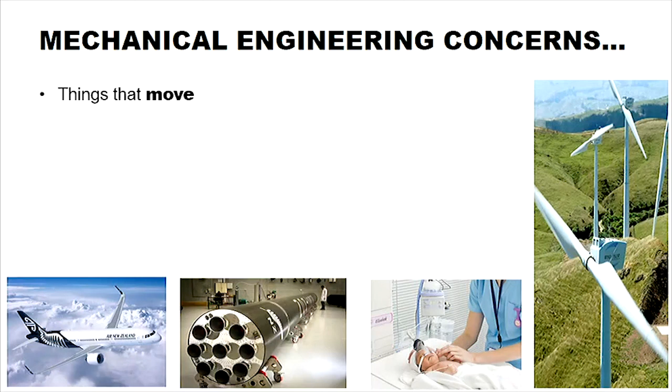Mechanical engineering concerns really everything that moves. The first thing you probably think about is a car, but there are lots of things that move, even things like the little motor that vibrates inside your phone. That is a mechanical engineering problem to a big extent, to make that one work and last for the lifetime of the phone. We concern ourselves with things that have to do with energy, use and conversion of energy, and also conservation of energy, of course.

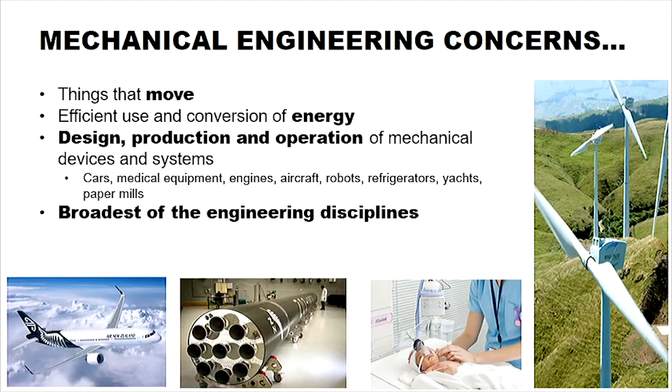And design, production, operation of all kinds of mechanical devices and systems. That is cars, medical equipment, engines, aircraft, robots, refrigerators, yachts, paper mills, and pretty much everything you can think of. I would say that mechanical engineering is one of the broadest of the engineering disciplines. You can work on pretty much any kind of area of your interest as a mechanical engineer. As soon as something moves, there will be a need for a mechanical engineer.

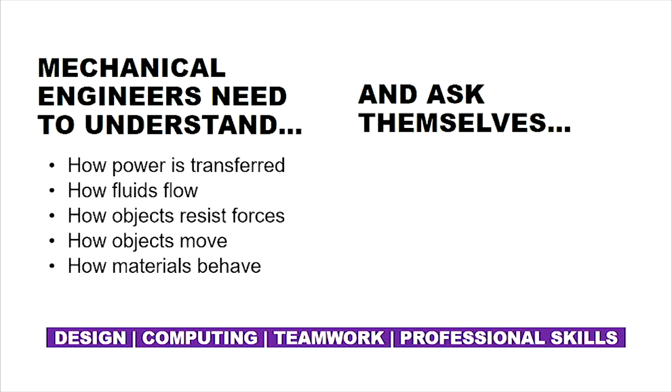As a mechanical engineer, you need to understand, for example, how power is transferred, how fluids flow, how objects resist force, how objects move, and how materials behave. That sounds kind of boring if you look at it just written on a paper like that, but it is quite exciting, all of that. And we ask ourselves, how can we control this? How can we design for the specific purpose? And how do we make our designs?

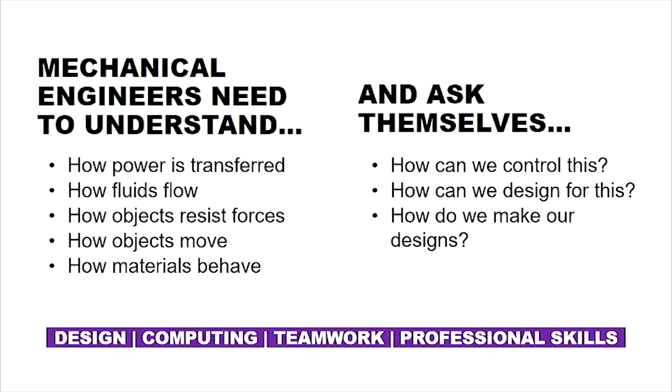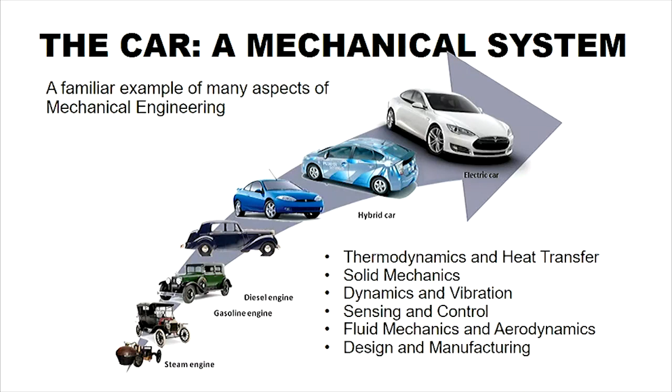Speaking of cars, the university has its own racing team. So if you're into motorsport like I am, I will show you just that in a moment. We have a racing team. It has about 50 students in it, and they build a new car every year from scratch - they design everything themselves, and then build it and race it in December in Australia every year. And that's a wonderful opportunity for the students to get hands-on experience. In my opinion, the students that have gone through the Formula team come out and they're much better engineers than the students that didn't get this opportunity.

But it's not just about cars. Mechanical engineering is about anything that has these basic properties: it moves, it transmits power, it needs to resist force, and so on. And they always give me these slides and try to put really interesting things into them. But I think they miss out the whole section of things that we don't think of necessarily as mechanical engineering, but where mechanical engineers actually work.

So I teach CAD - that's my profession, that's how I make my living. But I also use CAD and 3D printing as my hobby because I just think it's really, really fun. And I may not be the most girly girl, but I do like stuff like handbags. But I've always been disappointed - I bought these expensive designer handbags, don't tell my husband how much I paid for them - but I was never happy with it. I wanted a handbag that had to fit my iPad, had to protect my iPad, and had to have lights built in so I could find my keys when I get home at night.

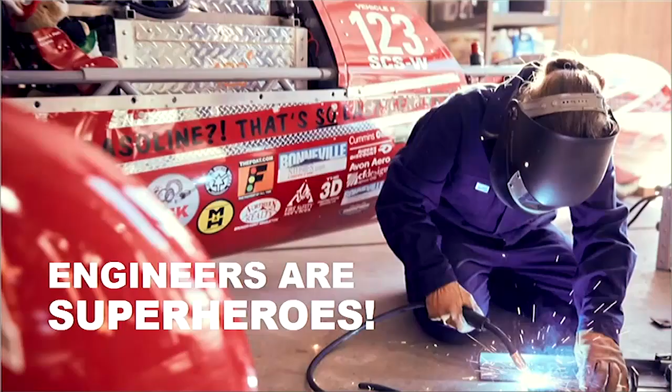Welding is one of my favorite activities. Typically not heavily emphasized in mechanical engineering, but it certainly is a specialization one can choose if you have that desire.

But as part of my superhero feeling of being an engineer, I wanted to save the planet, because that's what superheroes do. So when I was in engineering school 9 years ago, I decided that I wanted to build the world's fastest electric motorcycle. I wanted to show that electric cars are really fast and really sexy. So I just decided one day, let's build something that's insanely fast. So this is my own engineering project. This is my hobby when I am working on this, when I'm not teaching here.

The name of this motorcycle is the Killajoule. It is technically a motorcycle. I will send around two things. This is my next design, which I'm working on. It's a motorcycle because it has 3 wheels, and the official definition of a motorcycle is a vehicle that has 3 wheels or less.

So this is technically a sidecar motorcycle, but a very extreme motorcycle. Philosophically, it's really a car with 3 wheels. It is the world's fastest electric motorcycle at 434 kilometers per hour. And yes, I am the driver. No one else fits in it. It's that simple. So if you're more than 5'2", sorry, you can't take it for a drive or a ride.

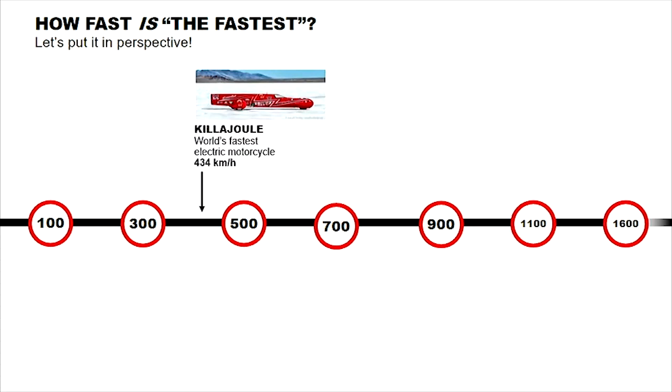Anyway, on this line, I am there. I am just a tiniest bit slower than the world's fastest production car. The world's fastest production car is at 447 kilometers per hour. That's quite a bit faster than your family car, a whole lot faster than the Nissan Leaf I drive to work every day. But it's definitely fast enough for Auckland traffic.

And 100 kilometers per hour was the world's fastest car in 1899. That's a speed that I'm happy if I can reach in the morning traffic here in Auckland. The world's fastest car in 1899 was battery powered. And then shortly after that, internal combustion took over. And now, as you all know, electric cars are coming back again, big time.

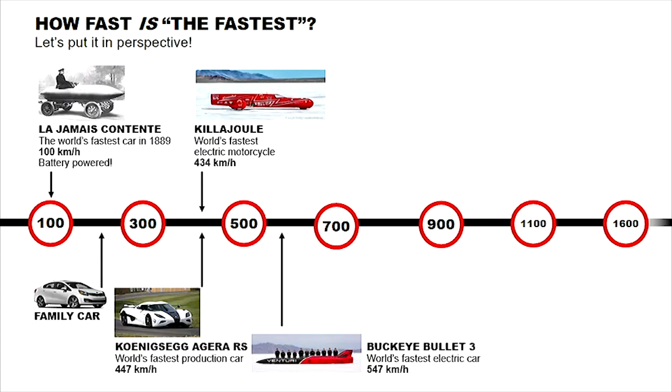The world's fastest electric car is a whole lot faster than I am, 547 kilometers per hour, built by Ohio State University. I want to beat them, of course. That is still quite slow compared to the world's fastest wheel-driven car, that's over 800 kilometers per hour. It has a turbine engine from a helicopter as its powertrain.

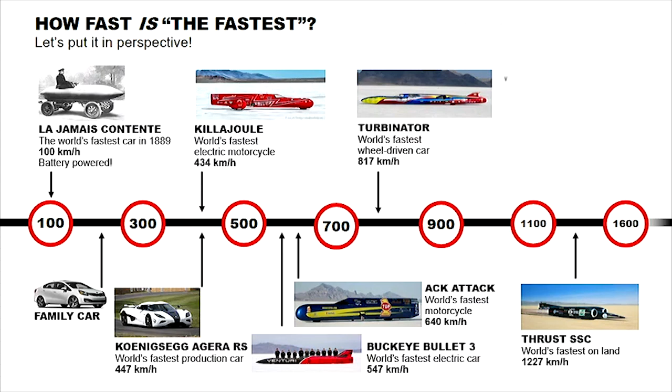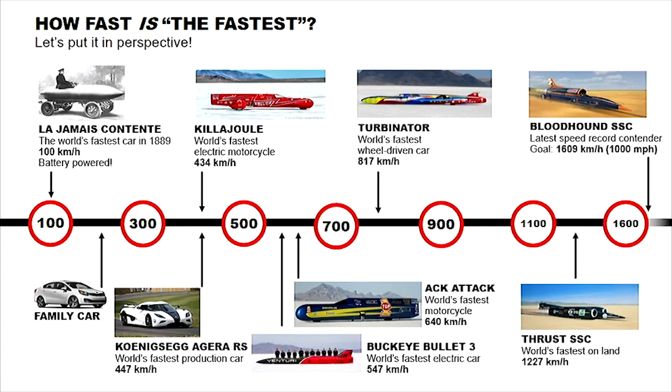The world's fastest motorcycle is over 600 kilometers per hour, so that's where I'm aiming for with my next project. That is still quite slow compared to the world's fastest car, which is actually supersonic, so it beats the speed of sound at about 1,200 kilometers per hour. That in turn is quite slow compared to the latest contender that's shooting for 1,000 miles per hour, or 1,600 kilometers per hour. And these cars up there at the very top, they are thrust powered, so they have jet engines or rockets. So there's always more you can do, there's always faster you can go.

So you know, when you're in engineering school, you have so much time to spare and money to spare. Yeah, that's of course a joke. You have basically no life outside school, really no matter what engineering degree you choose. But if you squeeze in an hour between physics assignments and maths homework, and you work on some project that you have passion for, you do that week after week, month after month, year after year, you actually end up with something quite amazing. So that's what I did.

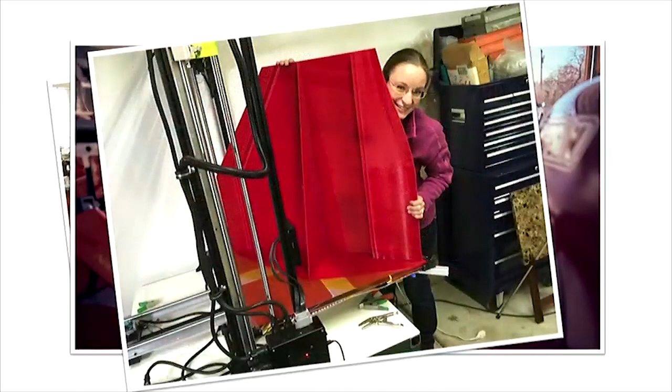I have a husband that's an engineer as well, quite a bit older than I am, so I had the opportunity of having a small workshop at home. So things were a little bit easier for me. But you can always start out with a smaller project, and if you really want to build stuff, you will find a way of doing so.

Here at the university, we have, for example, the Unleash space. It's open to all students. So there's the headquarters, the two-car garage where this motorcycle was built. This was in Colorado, where I lived until 2 years ago, and then I came to New Zealand to teach here.

So why did I dedicate a big part of my life and my whole savings account to building the world's fastest electric motorcycle? Well, I was upset that electric cars didn't seem to take off. We know they're better from an energy perspective. We don't get any pollution where we drive. We have much more independence on the energy sources.

And still electric cars kind of seemed nerdy somehow, and this was way before Tesla really took off big time. So I thought, if I build something that's insanely fast, that will get the gearheads interested in the electric motorcycle, or electrics in general. So that's what I wanted to do. I wanted it to be insanely fast, and I wanted it to be sexy.

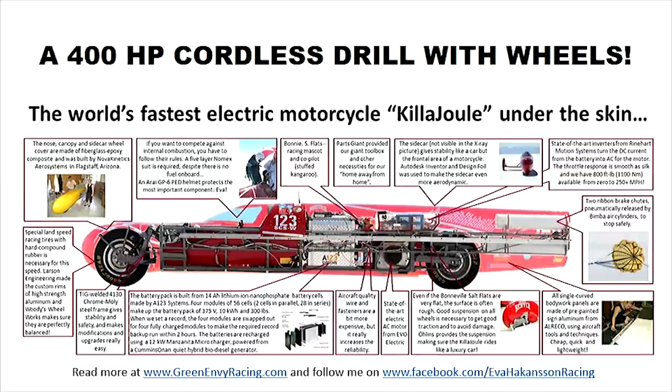So the Killajoule that you saw in the picture is retired after 9 years on the salt flat. You race for speed records on salt. Salt is incredibly corrosive, and it simply has reached the age where it's starting to fall apart. So I retired it this year, and I'm building a new motorcycle.

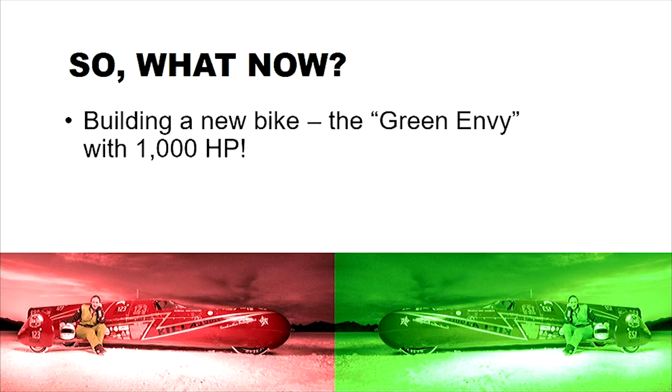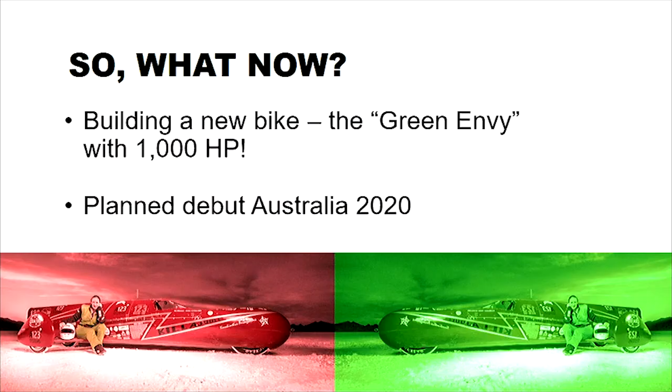Green Envy will have over 1,000 horsepower, and the planned debut is in Australia 2020, so in March 2020. Green Envy is the green model that you see floating around here. So this is what the current rendering looks like. The goal is to become the world's fastest motorcycle, full stop—beating all the internal combustion vehicles, and showing that electric vehicles aren't slow or boring.

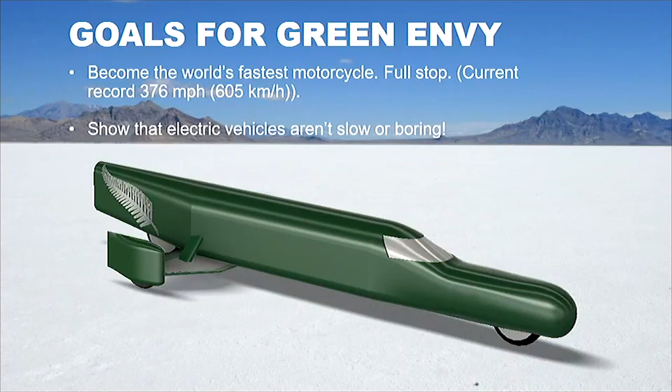This is what it looked like a couple of months ago. So this is CAD, exactly what I teach. You design, I love CAD. We teach you that in the first year. I think it's just magic, because what it is, I have an idea in my head, and I just pull it out of my head, and I put it into the computer, into a 3D model.

And this model has properties. It has mass, it has strength. I can see how things fit together. I can measure how strong things are, and I can do a complete design and see if I think this is going to work before I've even built it.

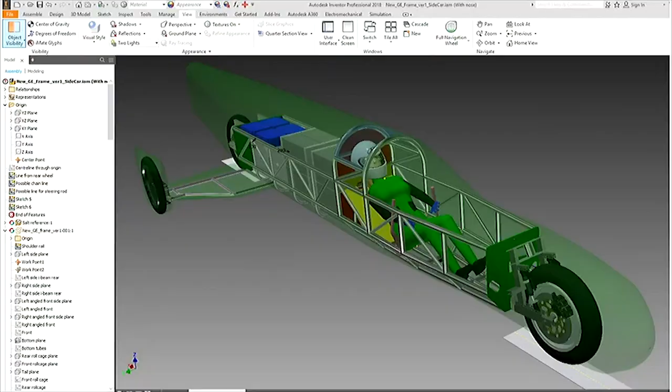And what I did, I took the computer files for this frame tube, sent them off to a company that laser cuts steel tubing. They plugged that into their giant laser cutting machine. It cut all the tubes, spit them out on the other end, and then you just put it together like a giant jigsaw puzzle and weld it together. And that took just a couple, 3 days to put it together and weld it, instead of working on this for weeks or even months if you were to do it by hand.